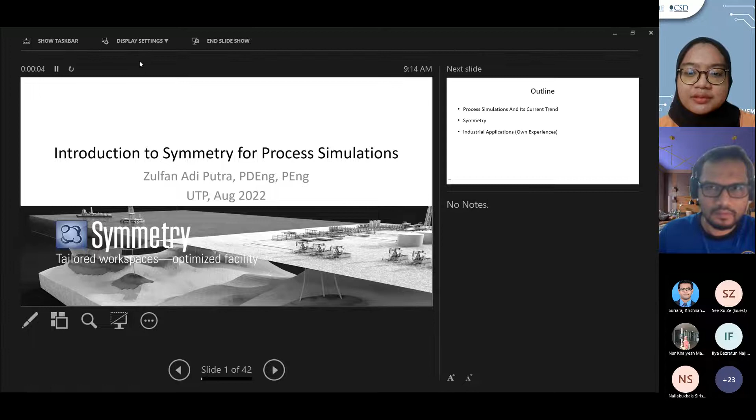Okay, so we'll discuss about symmetry first. Could you please remind me, are you all final year students or third year? Which one? I think they are from various years. Oh okay, well, no problem, let's just get started. Now, what time is it now? Okay, 15 minutes.

Before we go into how to use symmetry, I'll go briefly on some things I'd like to share about symmetry itself. We'll discuss process simulation. What is this? What is process simulation basically? Some of you may already know that, some of you may not, so let's just set some basic ground.

Then I will share something about what symmetry is, and my own experience using symmetry for industrial applications. I've used symmetry since 2016, so for the last 5-6 years. There are many other things I've done before that year, when it involved process simulation or modeling optimization, using different software. Some of those applications I will not be sharing here, because here we are discussing Symmetry, not process simulation in general.

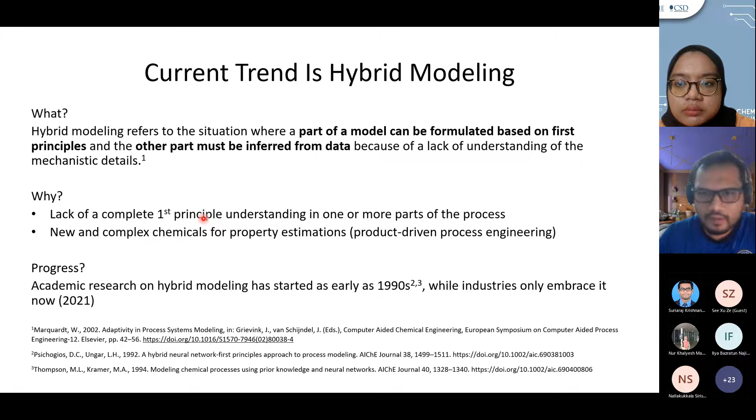This machine learning model, let's go quickly. So if we have data, either from your plants or from your literature, and if you have enough data, you can make your machine learning models, and you can also make your process simulation models for the first principle, and some properties or data can be transferred in between. For example, if we have data on a heat exchanger, and if you are reducing the temperature values, you can then predict with this machine learning model what is the overall heat transfer coefficient as a function of T, and then put that number into the process simulation model.

So you could do that, or the other way around. For example, if you have data, you can use the data to calculate the overall heat transfer coefficient, and then use that to build this model. Either this or that, you can use them, or both of them, to make a decision.

This is what I mentioned, what's in the hybrid model in unit operations capable of handling neural network models, and it is integrated with typical first principle units like flash, pumps, heat exchangers, and so on and so forth.

Now, symmetry. What is symmetry? If you know HYSYS, so Hyprotech, the same founding fathers made Symmetry, but Symmetry uses Microsoft Visio. So if you know how to use HYSYS, you could know how to use Symmetry without knowing it. It's just that visually it looks more beautiful because it has this Visio aspect.

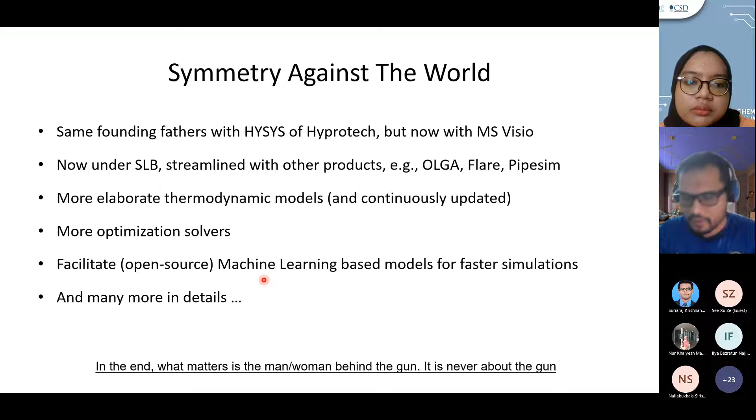So what I like and don't like, there are a few things. I'll go quickly on this. Thermodynamics, as I mentioned, in Visio, open platform for machine learning models, and robust neural network deployment related to the machine learning model.

And it's a flow sheet convergence window, so we can prioritize the recycling loop. The user interface is clean, straightforward, and you can use the same flow sheet to make a steady state and also dynamic model, just like HYSYS, but we cannot do so in Aspen Plus. In Aspen Plus, we have to export that steady state model and open it in Aspen Dynamics, and then fine tune it. It's not that easy a transition.

A lot of optimization solvers, many options for pressure drop correlations as well. Then contexts can be easily configured, just like HYSYS.

But what I don't like about this is, like I mentioned, I like Aspen Plus thermodynamics model much more. There are no shortcut distillation units in Symmetry, though Aspen HYSYS and Aspen Plus have them. And the development of our own unit operation is not as straightforward as in Aspen Custom Modeler. We can make our own operating unit in Symmetry, but it's not as straightforward as Aspen Custom Modeler in Aspen Plus.

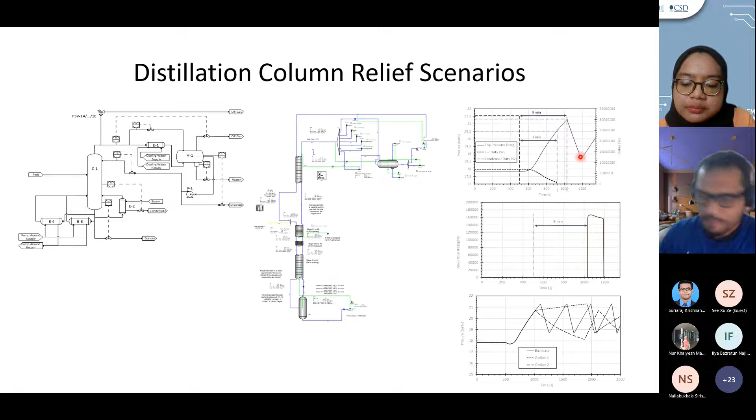Now I'll show you some stuff. This one, yeah, the rest is about the same, but I would like to show you this one.

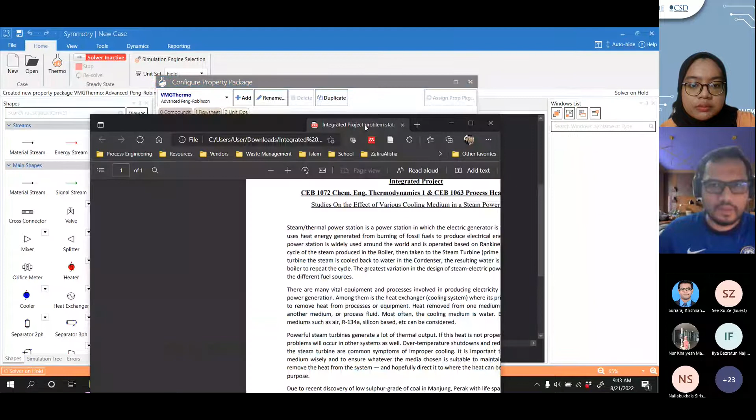It's about a cooling medium steam power station. So we have steam, which is basically water, right? And then is there any other stuff? Water - so there's no other. So we'll do water, and air, and R134A. So let's add water, and this is a steam cycle. So in this particular case, your thermodynamic model is the thermodynamic model of water - you can see the steam tables.

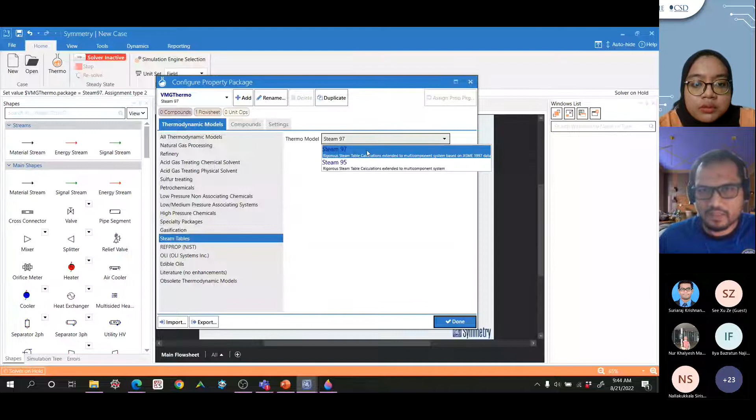Pick the latest one, the Steam 97. The compounds is basically water. You could either type and press the button once and press it again, and it will be selected, or you could double click to highlight it and get water. So double click, one click, and you get water in it.

The name of your thermodynamic model is then VMG thermo, so you could name it like your model. So your model is then your model, and then it's using Steam 97 thermodynamic model. Up until here, is it clear or not clear?

Can you follow or not? Yes, good. And then you click done. If you don't want to talk, it's also fine, just say yes or no.

Okay, now we have the thermodynamic model. We know how to select the thermodynamic model, and we know how to select the components that we need. The next step is then the unit sets, so we need to select depending on which unit you're familiar with. Here we are more familiar with SI units, so that's the units we're going to use.

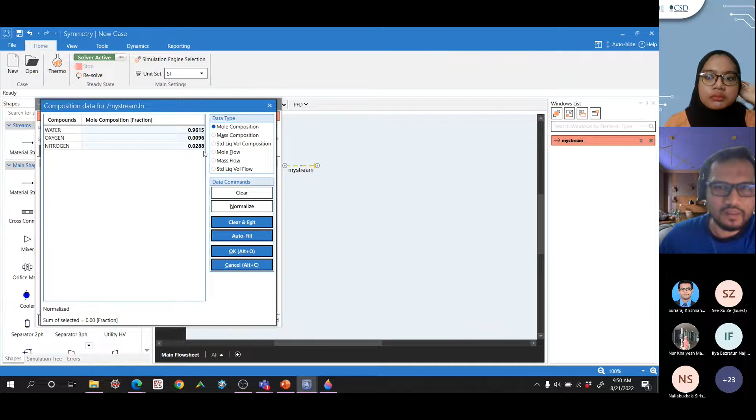So if you click OK, you will see this composition, and we can calculate the phase of that fluid. There are three items that we need to specify before we can calculate them: temperature, pressure, and the vapor fraction or phase of the fluid. In this particular case, with this composition and these conditions, your vapor fraction is 0.04, so basically you have 4% vapor and the rest is liquid.

So in this case, you can see your vapor is coming from these gases. Now, why do you need 2 out of 3? Why specify 2 out of 3, not 3 out of 3 or 1 out of 3?

That is something you have to ask your thermodynamics lecturer, or go back to your thermodynamics book. If you ask me to explain this, it will take another 5 minutes, so we could do that later on.

So if you remove this, for example I want to have just 1 component, you get a density of exactly 997. See? If you put another gas in, you'll have a lower density. And if it's pure water at ambient conditions, it is liquid — there's no vapor, so it's all liquid.

You can see the color changes — it was blue, now it's purple. What this means is you can go to Tools, then Settings, then Visio PFD, and you can see: if it's purple, it's a liquid, which is what we have now. If it's blue, like before, we have a liquid and a gas — a mixed phase. And if we have full vapor, it shows a teal color. You could change it, but I'll leave it like that. It's not something to memorize, but it gives an indication that the phase may change — it's a helpful visual aid.

Do you have any questions so far? No? Okay, if you don't, then fine.

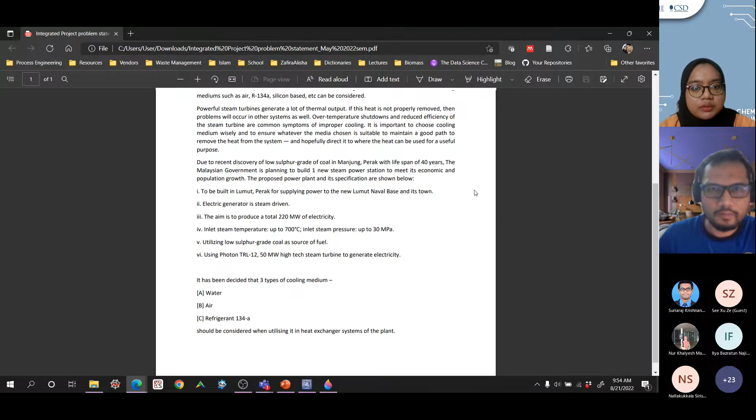So I will put it here. Just close this, I'll show you. Let's see if we can do this quickly. I'll put it side by side so that you can see it and I can see it. So small. Okay, can I do this? Okay, now.

Yeah, so this steam turbine stuff — let's read this together. The electric generator is steam driven and uses heat energy generated from burning fossil fuels to produce electrical energy. It's very inefficient from that perspective. This type of power station is widely used around the world simply because at the time people didn't know any better. Nowadays people know something better, but because it's been historically done that way, people are reluctant to change. Nonetheless, it's operated based on the Rankine cycle.

So what is the Rankine cycle? If you don't know, you can Google it. Or does anybody in the audience know what the Rankine cycle is?

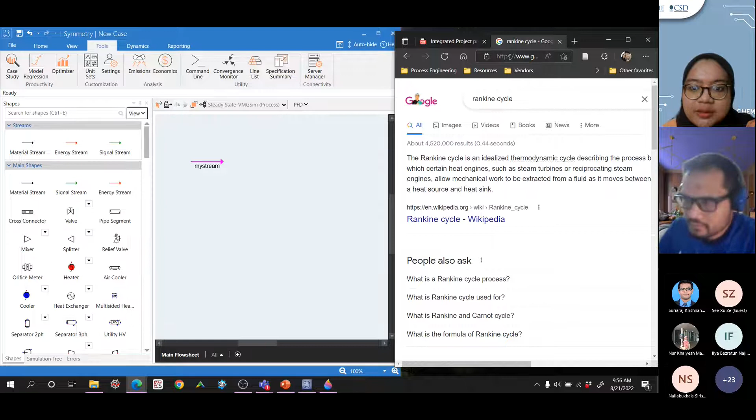So the Rankine cycle is... where's that stuff? This one. So we have, which one is the easier? Rankine cycle, I'll find a picture. Nah, this one. So you have this.

So it says you have a boiler, and you are burning fossil fuel, right? So you are burning fossil fuels, and from that burning you make your steam. Steam is produced in the boiler, so you have a boiler, and you are using fossil fuels in it, and you burn it.

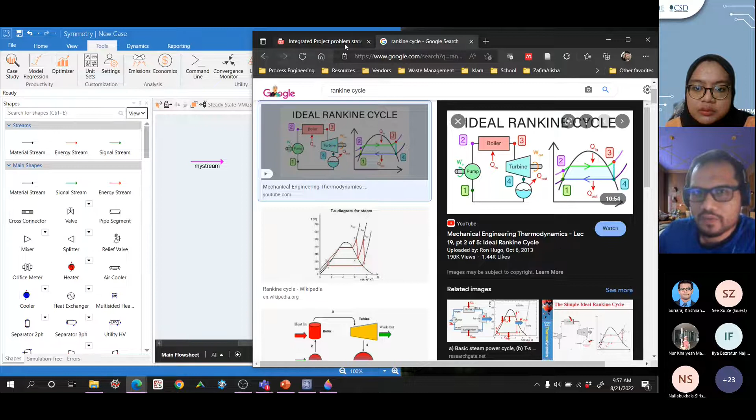So the question is, could we model this? We could model the fossil fuel, the amount. Just do that, for the sake of introduction. So now we have fossil fuels. What kind of fossil fuels are you using? It's not known, nonetheless, well, let's just use methane gas. So in that methane gas, say for example we forgot to put methane, right?

So we add methane. Click once, so you have your methane. So we burn methane. When we burn methane, we need also oxygen. We have oxygen, and then we have water, and we need also CO2.

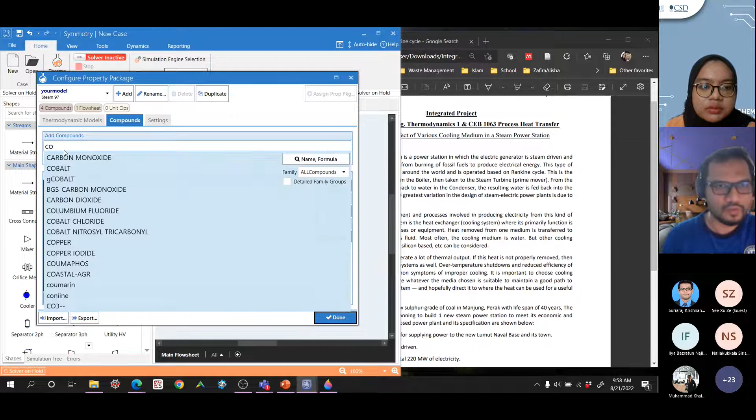So now you have your methane, for example, your natural gas, and assume it's like pure methane. And then it's ambient maybe, and simply slightly above atmospheric, because then you can push it towards the burner. So let's make it 2 bar, and the unit is in kilopascal.

So if you put 2 bar, you want to change it to bar, so you can either put 200 kilopascal, or you can press space, and then you have all kinds of units over here which you can select from. So 2 bar, which is then 200 kilopascal. You can also make it like, I don't know, 1000, just put a nice number.

Okay, so now we have natural gas, and you want to burn it in a furnace, right? So to burn it, you need to have oxygen. You have oxygen, air. It's also like 25 degrees C, like normal air, and it's also like 200 kilopascal.

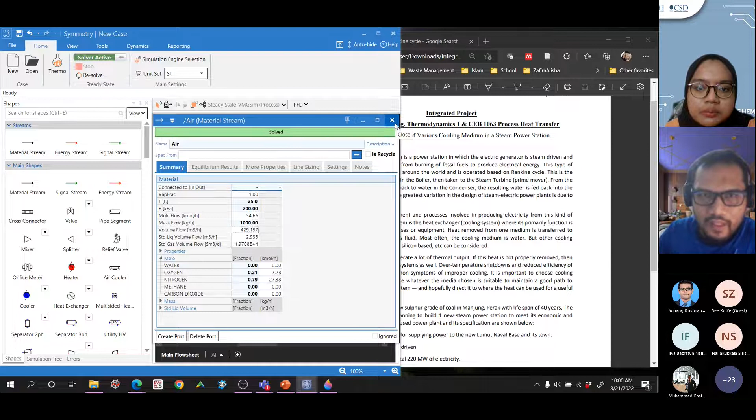Okay, so you have now air, you have nitrogen and oxygen. You have natural gas. So you burn it because you need to get that heat from the burner. So how to do that? Obviously, number one, you have to mix them, right? You cannot react something because it's oxidation reactions.

Just drag and drop the mixer, connect it over here, and then this one is over there. And then you can see it was gray, now it's dark black. It means it is solved already.

See, it's solved already. Why is it solved? Because we haven't specified anything. It's simply because there is one degree of freedom for this mixer, and it calculates the outlet pressure over here as the lowest between the inlets. So we have now two inlets, air and natural gas. This is then in zero, in zero is the air over here, which is air.

So this is quite inconsistent. This is also what I don't like about Symmetry, because air is on the top, air is on the very left, and I would expect that air is also on the top, not the bottom, but nonetheless it is there. So we have natural gas, and the second inlet, both are 200 kilopascals, so this is also 200 kilopascals then, and they are mixed together.

So it's simply a mass balancing, simply mass balance. You could see as well the mass is just 1000 plus 1000, 2000, and then the energy also will be calculated accordingly.

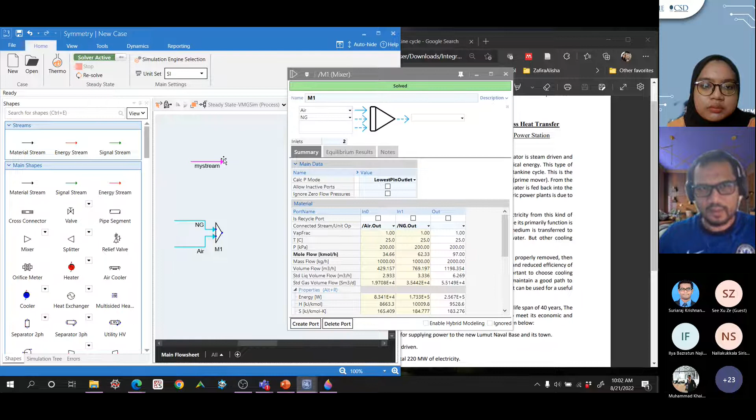So for every unit operation, in is somewhere on the left side like this, and the same goes with having in stream over here and out stream over there. That's how they calculate this block. It will be calculating block by block, getting information from the inlet input, and then it will calculate what's the output, just like this one.

So we can simply, because the output has already been calculated, just drag and drop this stream over there, and you can see this S1 is connected, and then it is solved automatically.

So now we have the mixed air, we mix the air and then the natural gas, and now we simply burn it. That burning is an oxidation reaction, right? So if we assume it's complete combustion, because what we care more about is the heat that we're going to extract from it, we can go to reactor.

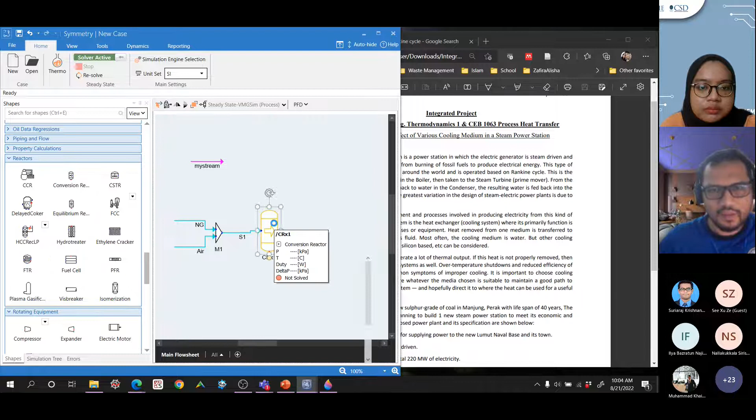Reactor is, yeah, you can simply just get a conversion reactor like that, and then connect it there, and then double click on that. So from here we have to define, since it's a conversion reactor, we have to define the reaction first.

So this is oxidation reaction. Now we can go to the reaction tab and click add or edit, and then you can name it oxidation reaction. And then you can say it's methane, right? So methane is -1. Methane has 1 C, so it means the carbon dioxide should also be 1.

And then we burn it with O2. So CH4 plus O2 becomes CO2 plus H2O. So how much is that DH? How much is DH?

It also means you need only 2 water. So 2 water needed. So we have CH4 plus O2 becomes H2O plus CO2. So you have 4 oxygen on the right hand side, that means on the left hand side you need to have another 2. So when you do so, you see that this balance becomes 0.

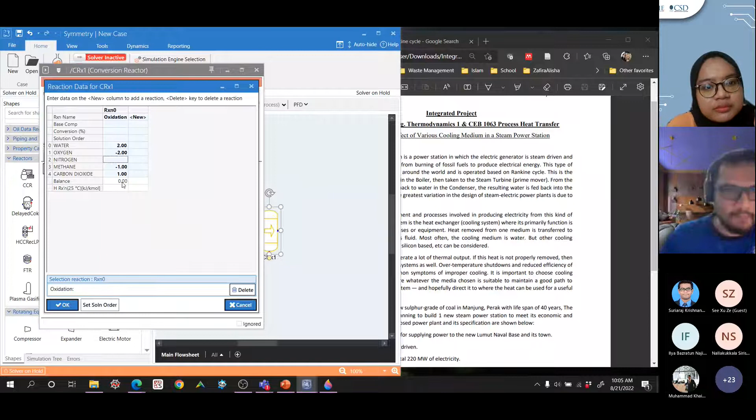This is now zero, that means the stoichiometric reaction. The conversion is 100%, so we assume this to be like 100. And then what is then being converted? So this is what this base component is all about.

So we need to specify. We have specified the reaction, we have specified the conversions. What we haven't specified yet is what is being converted. So in this case, what is being converted to 100%? What is being converted by 100% is then the methane. So in this case, we put methane.

Minus, you know what minus means, yeah? Minus means it's on the reactant side, plus is then on the product side. So this is then the conversion, and this is then the heat of reaction at 25 degrees C, 802 megajoule per kilomole. And then you click OK.

There's no other reaction, right? If there's more reactions, then you can just click new. Okay, so now we have the reactions. Up until here, do you have any questions, or can you follow this? I don't know, I know that I'm maybe too fast, but I'm not sure.

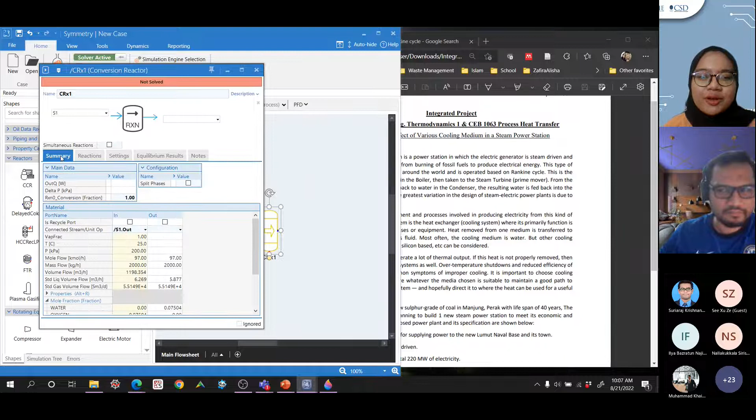Can you follow? I have one question. Can you open the reaction tab again? So how do we decide the base component? Is it something like limiting reactant, or how do you decide it is methane that's being reacted? The base component, so the reactant. But I think we have two reactants, right? Methane and also oxygen.

In this case, what exactly do you want to do with these reactions? You want to, because oxygen is an oxidizer, so it will oxidize something. But you cannot oxidize oxygen, there is no such thing. So if you oxidize methane, that means methane is a base component. Obviously, mathematically speaking, you could then use oxygen as a base component, it doesn't really matter as long as it is one of the reactants, you could do so. But then from the physical standpoint, something is the one that is being limited, so that's the limiting thing, and that is then the methane. Methane is being oxidized, that means methane is then the base component.

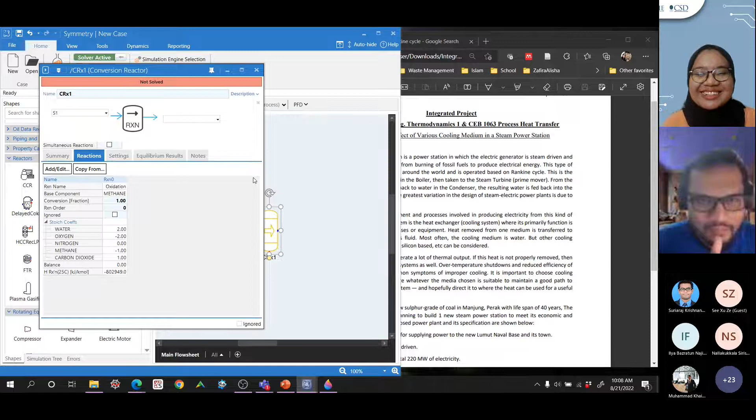Hello? Can you hear me now? Yes, I can hear you. Hello, hello, can you hear me? Disconnect and connect it again.

Hello? Hello, can you hear me? Yes, I can hear you now. So when did you lose me?

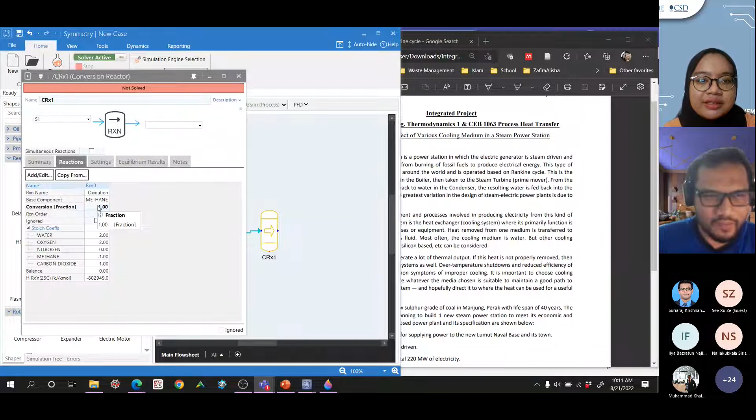So we were discussing how to use the base component, and I said the base component is the important component in the reaction—the one being oxidized, which in this case is methane, the main component in this particular reaction. Is that clear, or do you need another example on how to select the base component? I think it's clear.

We also have another question from the audience in the chat box. He asked, can we add a catalyst-based reaction into Symmetry? Yes, why not? The question is, can we or can we not?

The question is then how can we understand what is being done. In combustion reactions or other reactions, there are several things to consider. I think that stems from the understanding of reaction engineering—basically, it's not about the tool.

Let's see if I can write this. So now you have component A, and a reaction where A becomes B. You can say, well, I have a catalyst here, and during this period of catalytic reaction, I make B from A.

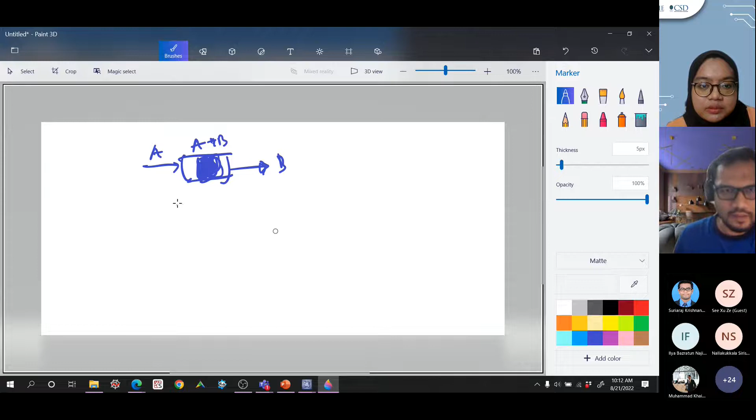So question number one is then how much B is being produced? If you know that the yield of B is 90%, that means you can simply calculate B. So you get your B. B is done.

Then you can come back with your reaction engineering class to say, okay, if I want B at 90%, I know this from the literature, and I know the flow rate of this stream, so I can calculate the volume. If you know the volume, and the volumetric flow rate, and the density of the mixture, you can then calculate the diameter of the reactor. From these simple calculations, you know the volume, the length, and the diameter—that's how you get insights on the size of your catalytic reactor.

So that's number one. Number two is if you don't know the yield of B, but you do have a kinetic expression—for example, rate of A equals minus K times Ca to the power of 1, 2, or 3. Let's just make it 1, for example, to make it easier.

In this case, you can say, for example, I want to vary this—I want automatic calculations so that if I have this reactor, and another reactor like this, where A becomes B, how much B is produced here, and how much B is produced here?

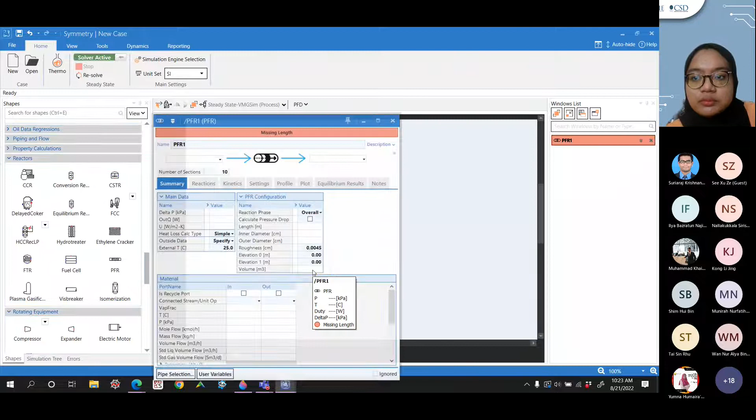Okay, and then we put it there, and then it goes to the reactor. Where was it? No, equilibrium reactor. So if you want to use this PFR, if you have the kinetics, like I explained before, you can use this PFR, but again you need to decide on the length and diameter, and then it will calculate for you what the outlet conditions are. So once you specify the reactions, all this kinetic information will be available. Now it is empty because we haven't specified anything.

But for this simple conversion reactor, for the questioner, if you the person who asked this, what's his name? Her name, Suharaj. So if you have a specific example on this, just let me know. You can write down the kinetics in the chat, and then I can simply show you how to do so. Just find that particular problem that you are concerned with, and let's do so.

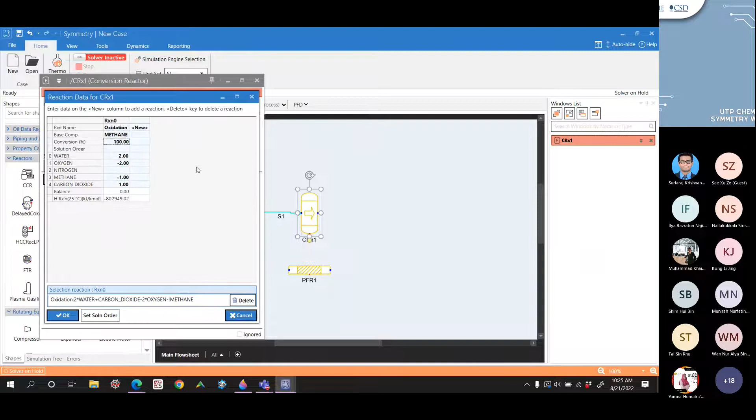So connect it over there, and then we have reactions first, and then we have methane is -1, carbon dioxide is also 1, and then water is 2. So conversion is 100%, and the base component is methane. So done, so we have done the reaction, and we know that conversion is 100%, or we make sure that it's going to be 100%.

And then now we specify, because as all fluids, it will only flow if there is a pressure drop, so that means we need to specify what the pressure drop is. So we either specify what the pressure drop is, or we just key in what the outlet pressure is. So say, for example, it's just a very simple reaction, so probably 1 bar, or something, is then 100 kilopascal. So 1 bar is then the outlet, the pressure drop, so the outlet pressure would be 190 kilopascal. Now, once we specify the reactions, we have specified the pressure drop, so we need to specify what the state of the reactor is.

So this reaction is an oxidation reaction, right? Oxidation reactions, which means it is an exothermic reaction. It will then release heat. So that's from the reaction standpoint.

But then from the reactor standpoint, are we going to operate isothermically, meaning we have a constant temperature? If so, we can simply specify the temperature here, and it will calculate how much heat is released, since we're releasing heat, but you want to control the temperature by using a different type of cooling medium, for example. Or we can let the reactor behave adiabatically, meaning there is no heat going in and out of the system. In that case, we put Q equals to 0.

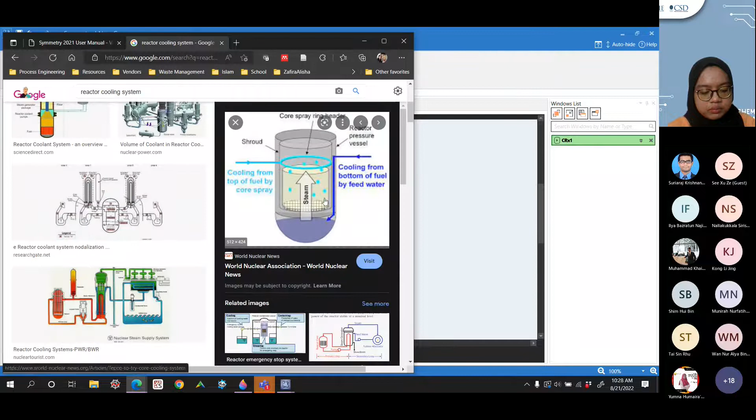So this reactor creates heat, and that heat is then used to create steam. Typically we have a jacketed system over here, so it's either around a jacket or in a coil. The amount of steam we could create, we have to calculate the heat enthalpy of that particular steam at that pressure, and then use this amount of energy. Then you can calculate how much steam you can make.

For now, just keep it adiabatic, keep it adiabatic. And this is it, for the time being. Then I'll show you, because we're going to need that heat. That heat is going to be used. Remember this task: steam is then being produced. Sorry, the heat is not being used, but that particular steam is being used to heat, to produce the steam.

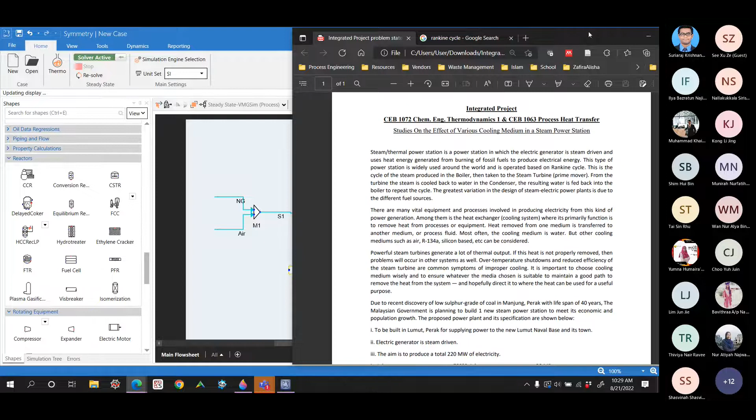So you could do it 2 ways. You do what I said before: what type of steam do you want to produce? Are you going to produce a higher pressure steam or lower pressure steam? So say, for example, you want to make steam, check the steam table.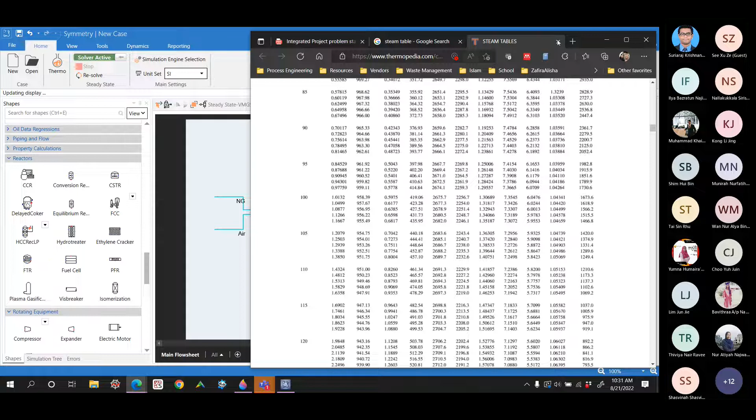Say, for example, you have this guy. Close this. So this guy, it can create up until 600 degrees C. You can see that, up until 600 degrees C. So that's 600 degrees C.

So you could then have, yeah, depending on what you want. I'll have to put that Rankine cycle again, because it has something to do with this. It will have everything to do with this Rankine cycle.

So you can see, because it will then create steam, and then this steam is going to be flowing through a turbine. The higher the pressure of the steam that you make, the more power you can generate. So it depends on the pressure and the amount of volume, the amount of steam that you are generating.

Since we have a fixed amount of energy, you can play around with what is then the pressure, what is then the flow rate, in such a way that you can find how much is then the electricity. So it's something that you have to find.

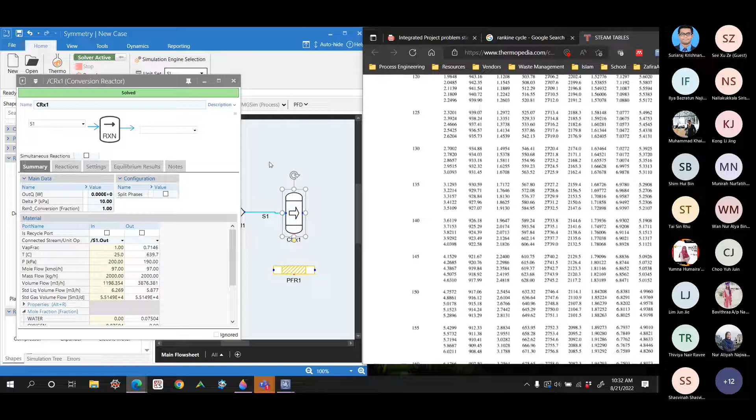So let's assume that we make, like I mentioned, a 4 bar steam for the time being. In this case, this is one approach. What I mentioned is that in this case, you make this...

So you make this like 160 degrees C, and then the steam that you can create, if you put like 4 bars, that means you need to have a temperature of about 144 something. So maybe then you can have a nice driving force in temperature. So 160 is good enough.

So then you can make about 4 bar steam, and then this is the amount of energy that you are releasing. In this regard, if you put this energy... no, it's not being used somehow.

Nonetheless, you know what the energy is, so we can then use what we call a process calculator. This process calculator is our control panel, so to say. So this control panel, steam 4 bar.

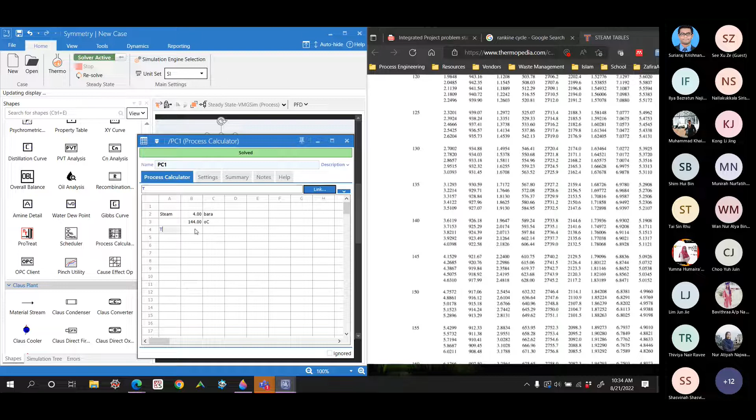4 bar, and temperature is 4 bar, and temperature is 140 something, 144 about. And then the amount of temperature in boiler, heater or whatnot. So this is then what we specify over here.

No, we cannot do so. So what we could do is make connections over here. There's another trick, because we cannot make connections. See, I cannot make a connection. So I remove this and put it over there, 160 degrees.

See, so this is now being calculated, and then you can see we can have the 160 over here, and then the energy is over there. Then we can say, okay, now I copy connections, and put it here, and then paste connections. So it is being connected, okay.

So for example, if I change this to 155, this is then changed accordingly, and the amount of energy released is this much.

Copy connections. So this is, yeah, it's very ugly. Watts - how much is this? Divided by 1E6, that's megawatts. 0.6 megawatt. Okay, save. Don't forget to save.

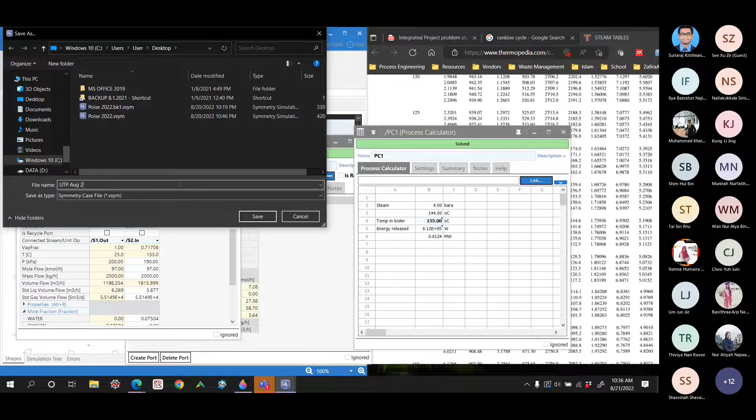Desktop. This is UTP. Oh, good. Okay, you can see now here, this value is connected to process calculator 1, PC1, sheet 1, and then B5 over here. So this guy.

Okay, and then this one is, yeah, that number. So that's one, and then you can say, okay, this is the amount of energy released, and then you can calculate if the energy of water is about, I don't know - for example, you can have about 2,100 kilojoule per kilogram roughly. That means if you have this megawatts, this has to be multiplied by 1,000 to get it into kilojoules, and then you divide this by this, and you will have steam in kilogram per second.

Can you follow? Can you follow or not? So we divided the amount of energy released by this energy of water.

So this 2,100 is what you get from the steam table. For example, on average, because the heat of evaporation of water varies from temperature to temperature, or from pressure to pressure - the highest being around 100 degrees C or less, it's about 2,200. So on average, I would make it like 2,100 kilojoule per kilogram.

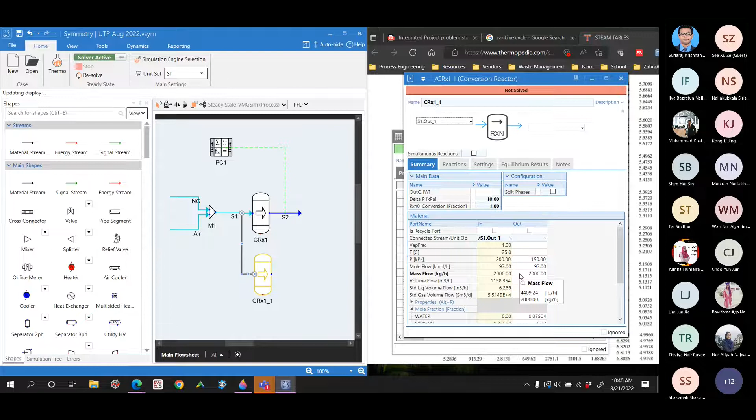And then we can see, say for example, if I want to make this adiabatic, yeah, so I contain the heat. So it's the second way. So it will then be doing it that way. And then we have the outlet stream.

And then this outlet stream, we need to use that energy, right? Because this outlet stream is 639 degrees C, I want to use that energy to create the steam. So in that sense, we put a cooler in it, and then that cooler is...

Oh, I don't need to. I can directly put a heat exchanger, because then the heat exchanger - so heat exchanger, and then I have to have a stream, right? So water stream, because I want to make it a steam.

And then this is obviously like 25 degrees C. It's also like I don't know, so this is then depending on the bar and the pressure. So say for example, this is option 1.

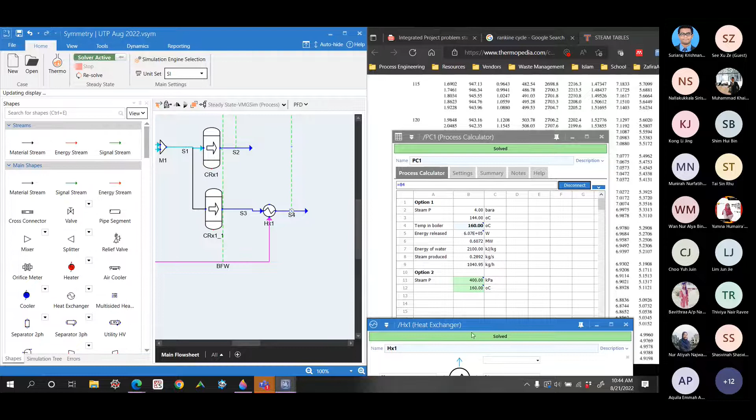So now it's all so, once we know the temperature outlet over here, that means we will then calculate how much the Q, and then that Q is then going to be used to heat this water stream. So this part of the plant is calculated already, like you see - it's calculated already, and it's just a matter of us connecting them.

So this is then the steam being used. That steam being used is S5. So S5 is in this case, yeah, it's 1,000, right? And then the temperature is about 141 degrees C. So this is our approximation - it's not that very accurate. So 144, but then this 141 degrees C is the one that is more accurate.

But this is related to this particular design. So we have this 1000 inlet, and then we have everything else. I think about the same - it's just a matter that we have the enthalpy of this particular steam. We use it differently, so it's not 2100. It's something that is more accurate regarding this pressure and temperature.

So this is then your steam. I've now shown you two ways of creating steam. Steam is steam produced, and it's basically your input - this guy is basically the input. But nonetheless, just copy this. For the sake of completeness, this is then temperature.

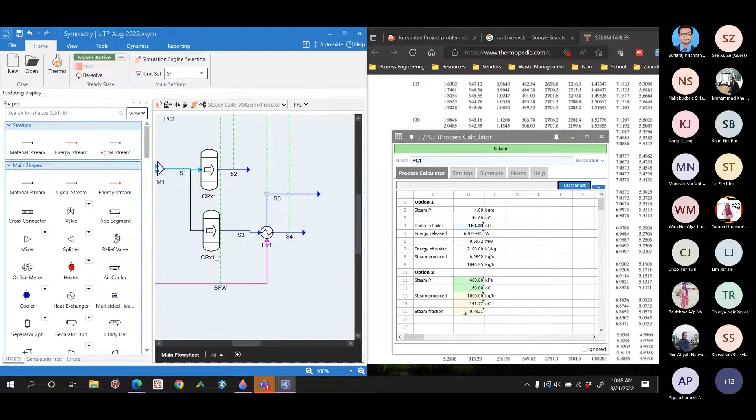Okay, so now in this particular case, if I have more natural gas, that means I could do a lot more. But one more thing to consider is that these combustions, we assume it to be 100% combustion. So that means, practically speaking, the concentration of oxygen at the outlet of the reactor, at the flare tip, has to be like 2 to 3%. So this concentration has to be 2 to 3%.

We are not enough - see, this is not enough. So we still have a lot more methane not burnt. So I'll open for you the reactor itself.

So oxygen is consumed in the outlet, sorry, flow rate - for more flow, oxygen is consumed, but then the methane is not consumed completely. So we need to increase the amount of air in such a way that we can consume the methane a bit more. So what we could do in this particular case...

We fix this because this is still not consumed, and then this is consumed completely, the air. So we need to increase the air flow rate, right? So now complete combustion.

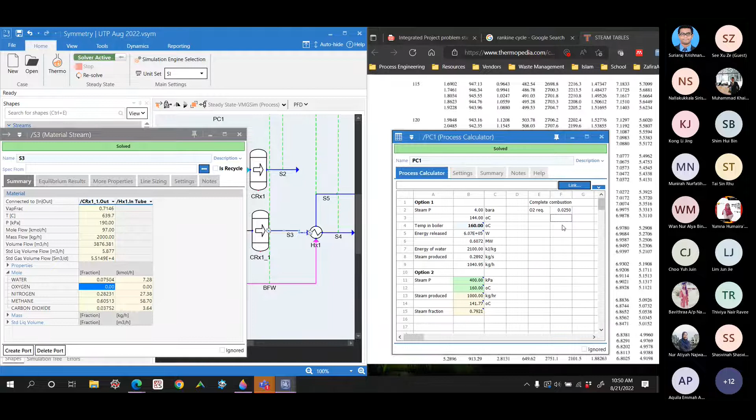So I copy this, and then this is then what I have to paste. Does it want to be copied? Oh, another extension. Copy - this is calculated. So that's the error, that guy.

Okay, so in this case, we want to minimize this. So we minimize this in such a way that we increase the air flow rate, right? So if we minimize this, that means this guy becomes closer and closer to 2.5%. So how do we do that?

We either make it like a manual, like this. So I increase now - so I increase now to 2000. We have a temperature cross in here - we have a temperature cross in this heat exchanger. So something that we have to be careful about, but we still need to...

We will look into this later on, yeah, we'll look into this later on. But we are not getting any better. So we could also make it like 10,000.

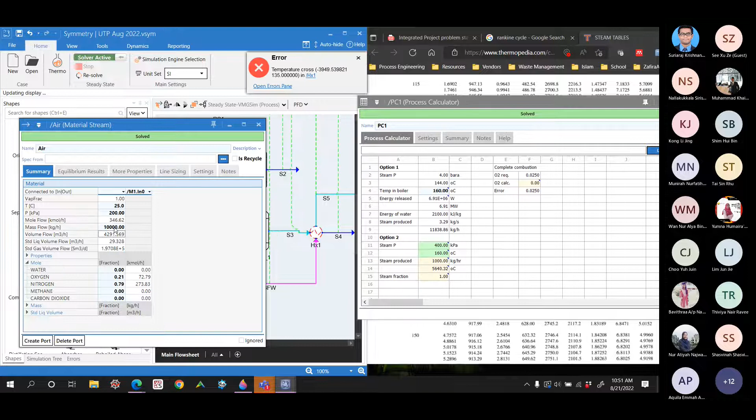So we're also not getting any better in this reactor, so indeed we will have to reduce this. We have a reduction in the methane - it was 58 something, now it's 25. So we are getting somewhere.

So we can set up a controller to adjust it automatically. I want this error to become 0. So I copy connections, put it over here. The target is obviously 0.

Target is obviously 0. And then what do I manipulate? So what I manipulate is the flow rate of the air - in this case, this guy. Copy connections and put it over there. And then it means the step size - you can put, I don't know.

So now the target is 0.05, so it's not yet okay. We want to have it like - it's 1.9, so it's less than 2.5%. So you want to make it - you can increase this a little bit more, I don't know.

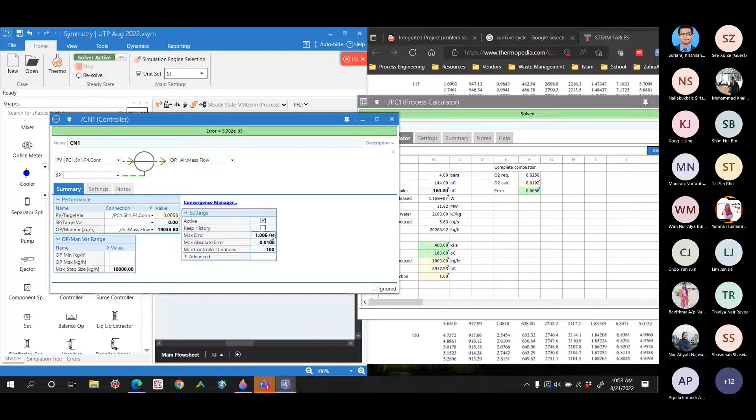Maybe you can increase the maximum error to become like either one of these - there. So maximum absolute error I increase, I reduce the absolute error, so that will then create this. So in that sense, we need to have 19 tons of air, as opposed to 1 ton of air previously in the original case. Okay, so that's how we solve it.

So we have the complete combustion criteria fulfilled, and now we have to solve what is then happening. We'll have to make this nicer - I want to make it like, how do you call it, there's a temperature cross. So what is happening - temperature cross. So we have, for example, in this case.

So we have the adiabatic temperature rise of this stream is about 1700 - it was 600, now 1700, much higher. And then we want to reduce it to 160 degrees C. By doing so we are increasing - we are using the steam, which is then we use 1000. Because we are increasing the amount of energy, that means this flow rate of water is too small. Because it is too small, its temperature goes to thousands of degrees C, which is not correct.

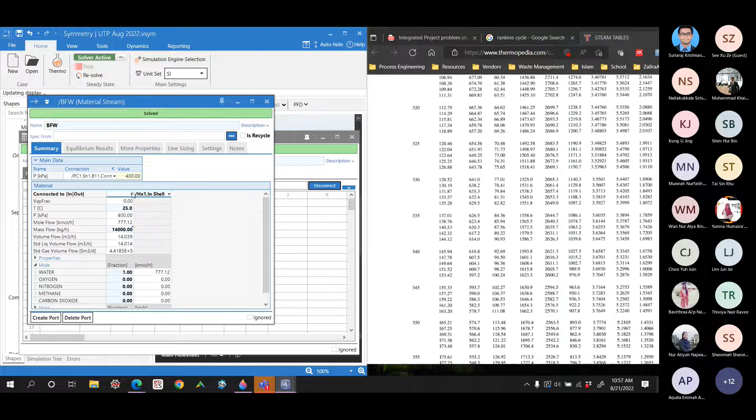Yeah, so now we have 400 kilopascal of pressure. So if I want to increase now, instead of 400 kilopascal, I want to have this also controlled. I will then have to remove these connections, disconnect, and add somewhere here - so this is then 4 bars.

This times 100 kilopascal. This is then connected to the stream. Okay, so now we are aiming about this 330 something degrees here, and then if we increase the pressure - a minute, yeah, how do I pressure?

Connections. Oh, this is the pressure, so I put it in bold. So if I want to increase the pressure, for example, in this case 137 bar, so it's about the steam produces about 400 degrees C.

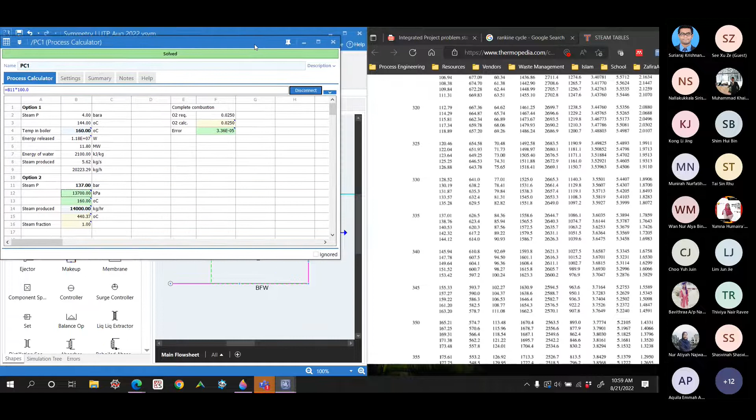Where's the exchange? Where's the stuff? At 400 degrees C, I increase the steam pressure to 400 degrees C, and then the flow rate is that number. Yeah, it's about that.

Now, this is the amount of steam that we can produce, that we are producing with this setup. And then what do we do? Hey, is there any questions? Because I'm now doing this myself, and I feel like I'm losing you, or you are losing me.

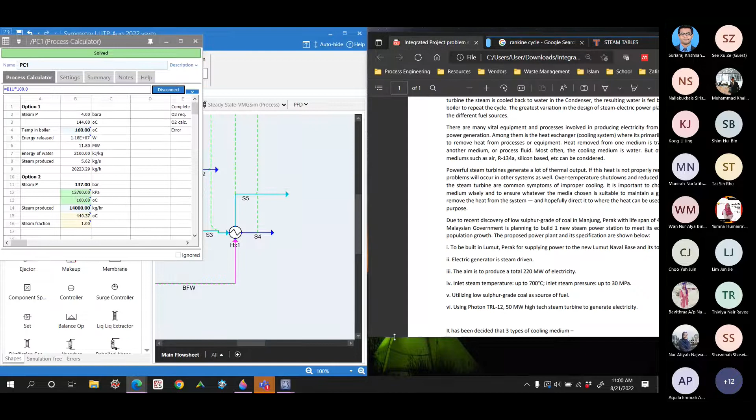How do I make this? Now this looks complicated, but I'm just showing you all the possibilities. It's all up to you to pick which one is okay that you want to follow.

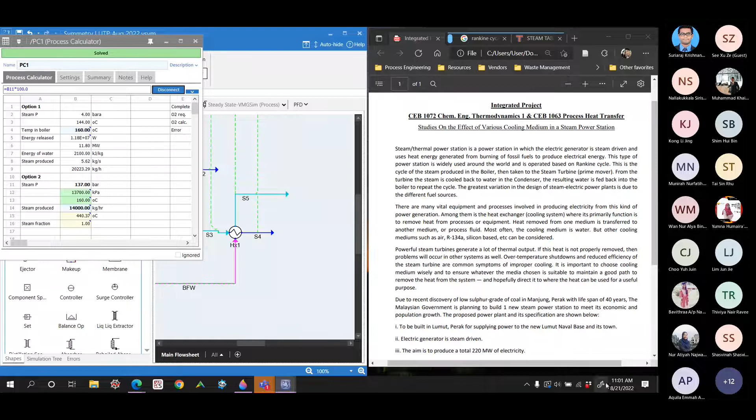So we have the steam, which is over here, and then this steam is going to be sent to a steam turbine. There's the third way, where we make the cycle first, and then we work around it. So let's do so, let's see.

That's another way. So this is the first way, second way, and then there's a third way, which is the easiest one, which I just realized. So we now expand this to a turbine, this steam to a turbine. So we expand it to, like, for example, a condenser, where we have to have like water or air.

So in this particular case, we can then drop it down to atmospheric, for example. Atmospheric is then, so let's put like 150 kilopascal. And then the efficiency is about, let's put efficiency about 85%, and then you can see now we can get the energy out, which is in this particular case 2.8 megawatt.

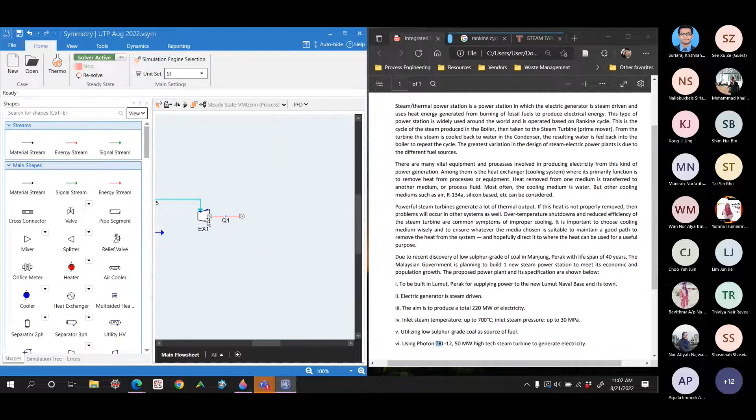So I copied this, 2.8 megawatt copy connections, and then put it, where is that guy, put it over here. Turbine efficiency, 0.85 megawatt, and then this is then the efficiency is, yeah, I need to have, it's not that easy.

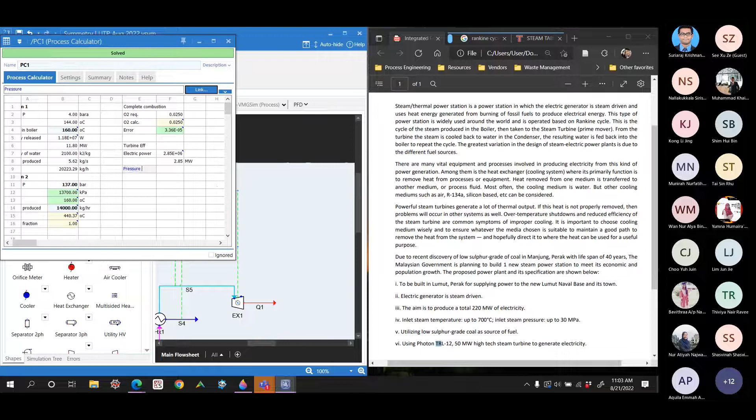I need to have like pressure out. Not nice, because these two, pressure out and turbine efficiency, are the input, so we need to make it... copy, no I'll do later. Okay, and then we have now the stream.

50 degrees C. So again, we use the same trick because we want to copy that number. So I delete that over here, put it over there, and then I copy this kilopascal. I increase this to 150. So we would expect the electric power would then drop by a certain number, so it drops to 2.7 instead of 2.8.

So you have like a much more efficient turbine, then we can have a higher, a higher or a lower efficiency. So that is one way, and then now we have this turbine. So let's complete the cycle. What do we have next?

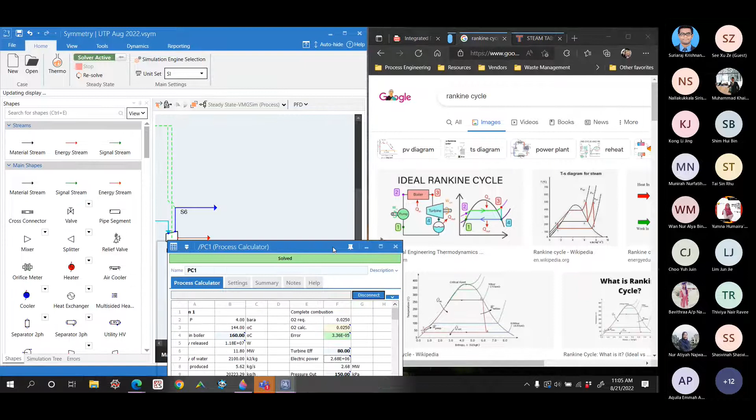And then it's a cool back, so we have the turbine. So we have done this, we have done that, and then we are cooling it down. We're cooling it down. What's the temperature over here? So to know this temperature over there, you can either hover over it or double click on that, or you can have like a show PFD data sheet.

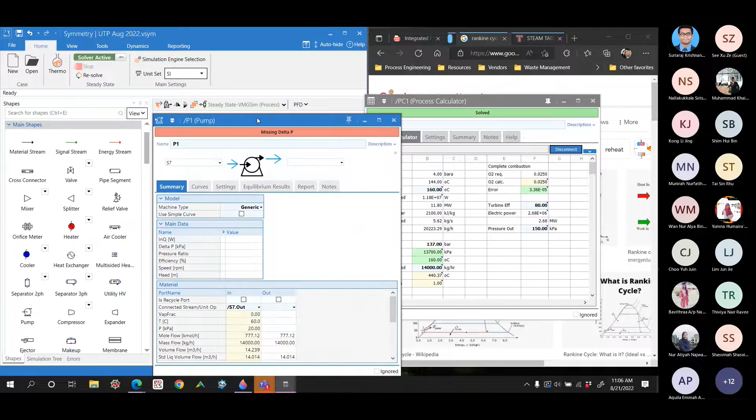And then once we cool it down, we pump it again. So we have a nice pump operating only at like 60 degrees C. And then we switch it the other way around, put it over there. And then I have the pump is, again, efficiency is about, I don't know, 70% maybe.

And then the outlet pressure, because now we want to have, no, that's the trick, we want to have a pressure of about 137 bar. So we need to have 137 bar.

That's one. So we are pressurizing it to 137 bars, and then we are connecting this to that heat exchanger. So save it first.

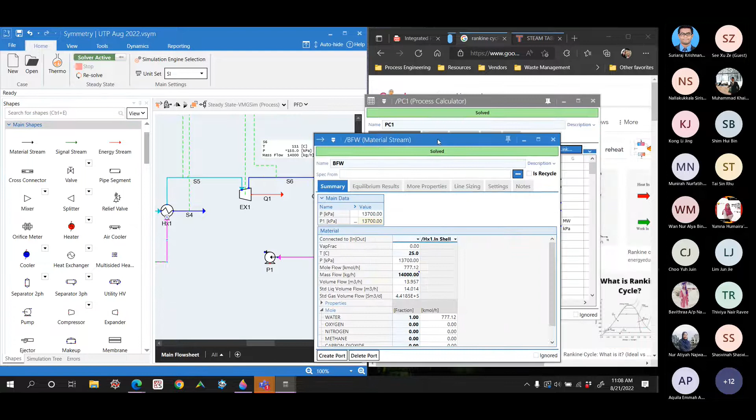Now let me think on how to better do this. This is what we have from this stream - steam pressure is that guy, which we can copy later on. This input is basically 137, which we can take from here, and this is also there. So what we could do is make a copy, or I'm not really sure if copying this would be that easy.

Now I will take this out. Okay, it is all locked, so I unlock this and take that out, and then make this guy over there. So now 137 is...

137. So this is option 3. We make the cycle now. Steam pressure, just copy this guy. Like this. This is bold.

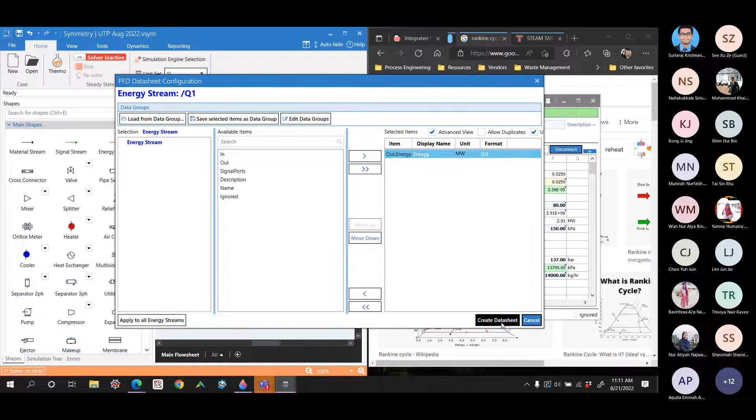So apparently we do it right. So in this particular case, where is that stuff? I want to have this Q. Show. Right, and the unit is in megawatts. So this is the amount of energy that we are using, and then this is the amount of energy that is being fed in. Copy that, add to PFD data sheets.

Add to PFD data sheets. Come on, add to PFD data sheets. Oh, we have it already. Sorry. Config. Delete. This is in megawatt as well.

So we see that we have energy coming from this burning of the methane. It's about 11 megawatts, and then the amount of electricity that we produce is about 2.9 megawatts. So that's very inefficient.

So what you could do, because there are so many inefficiencies here - we have inefficiencies in the pump, which is then 70%. You could also extract this out here. Extract this out - turbine efficiency, pump efficiency.

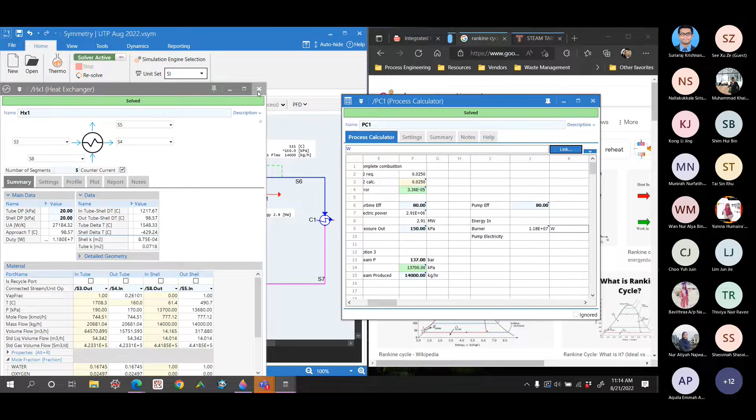So we have burner, we have pump electricity. Burner is this guy. Copy connections. So this is one - this is thermal energy. You have to make sure that this is what is thermal energy.

And then we have also electricity from here. This is electricity, not thermal energy. So the watts, even though they are the same watts, they are completely different. What's electricity? To create electricity from thermal, there is a huge efficiency loss as well.

But nonetheless, if we assume 100% efficiency in this case, we have a total energy in watts. So you can see the electricity is not that much compared to the burner. So, energy out - we have electricity produced, we have condenser. So in this particular case, energy produced is this guy.

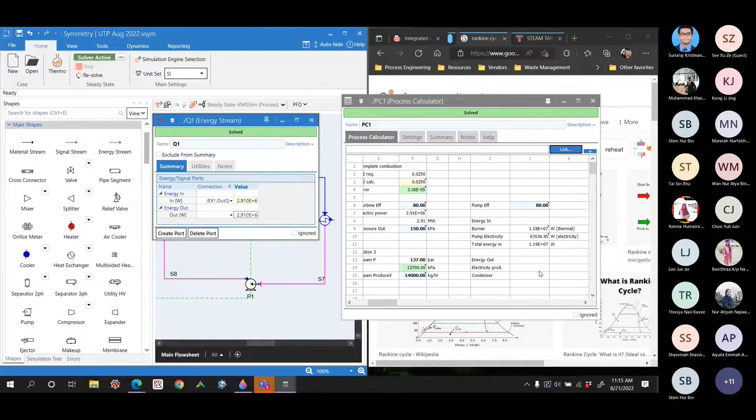Yeah, you could copy this, copy connections. So you have watt as well. And then sorry, can disconnect. Copy. Paste. And then this is then the condenser. Copy. Paste.

Okay, now you have a balanced system. So you can say, okay, now the efficiency of this cycle highly depends on how much energy goes where, because the goal is to create electricity from the energy.

You can see much of this energy, 11.8 megawatts, goes to this condenser. About 9 megawatts goes to the condenser. So efficiency of the Rankine system.

The amount of energy that you produce divided by the amount of heat that you have in, or basically that. Or maybe you could make both, because this is also energy that you need to pay for. So you could do this or that, up to you. So in this case, this compared to.

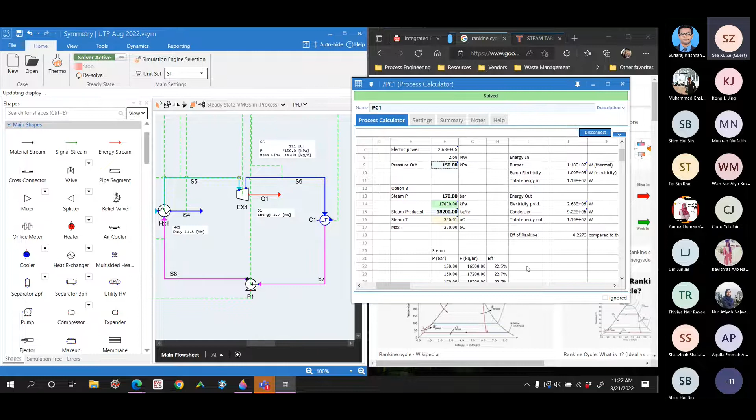But then this is limited by the maximum temperature that we apply. So if you don't have any limit on this maximum temperature, as you saw before, you could increase this efficiency a lot more. That's the thing that you can play around with. You could also play with the pressure out - this pressure out dropping down, and then you can see how much the efficiency can be increased. I'm not really sure if you can follow me, but nonetheless.

It's all like blah blah blah. The aim is to produce 220 megawatts.

So now, if you know that you have to produce 220, how much is this? It's only like 2.68 megawatts. So that means you have to increase the size. Yeah, we have to increase the size. So what's the size? The size is then the amount of...

Because all of this electricity is coming from burning the fuel, that means you have to increase the amount of natural gas or fossil fuel that you need to make. But this is by no means green energy, because it's all fossil.

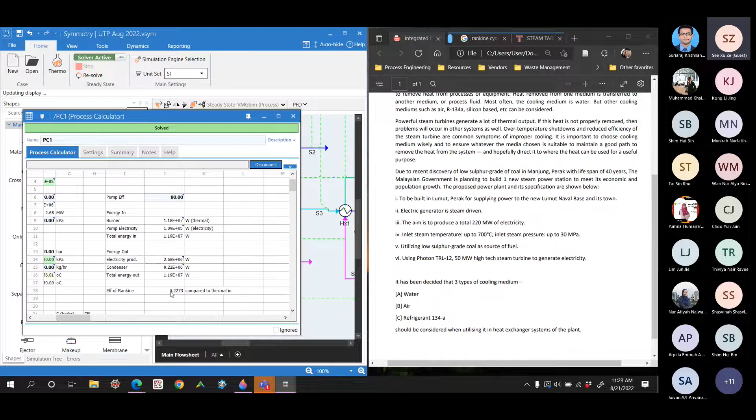So inlet steam temperature can go until 700 degrees C, while in my example it's 350 degrees C as the maximum. Inlet steam pressure about 30 megapascals, so about 300 bar. So now you have 170 bar. Now you can play around until 700 degrees C and 300 bars.

Low sulfur grade coal as source of fuel. Even use coal, okay, it's even less green. It's dark black.

Photon, yeah, I don't know what it means. So it has to be something related to the efficiency of the turbine. High-tech turbine, so find out what the efficiency is using this number.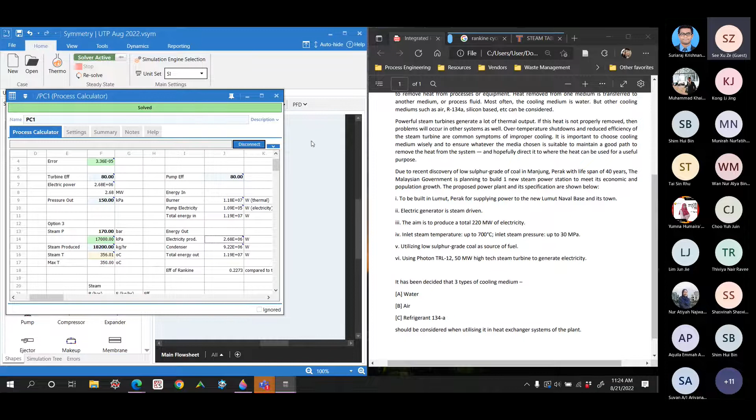Okay, I think I will stop here and see if there are any questions. I'm not really sure if you can follow me, let me know. Yeah, because I was just playing through this for myself, rushing a bit. So any questions? No questions? Hello.

Hello Mr. Zulfan, yeah. Actually we have one question from the beginning of the session, from Nalakula Sirisha. She asked whether the system can be used for desalination purposes.

You can do it with everything that you can think of, because basically it's all tools. The most important thing to know is the functions, what that process is all about, like desalination - what is the process all about. Like I showed you what this Rankine cycle is all about, and from that process we then derive what type of functions that we need to have.

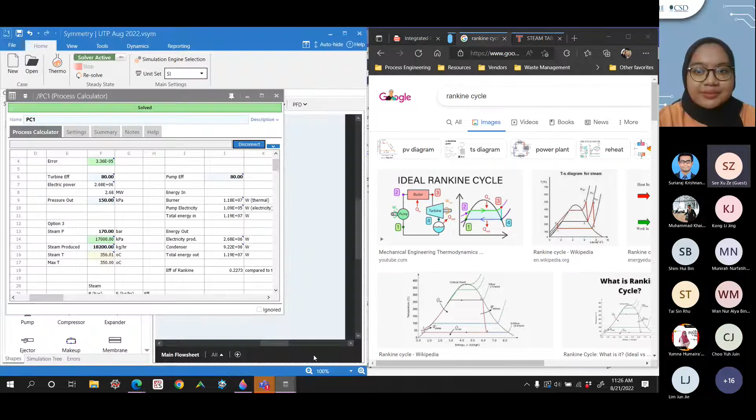So for example, in this case, your Rankine cycle, we need to have something that burns the fuel. Hence we make this, and then this. What do we burn? We have the fossil fuel - in this case I put natural gas - and then we have to have air, and then we define the reactions, and then we extract the energy.

So that's this reboiler. The whole thing with all of the controllers on the air burner is then the boiler basically. So this whole thing is the boiler, and the steam is this whole line. It gets steam, the steam goes to the turbine, then to the condenser, then to the pump, then back to the boiler. This is how you saw it already, how we model this. Understanding the process is very crucial - if we understand it wrong, we will model it wrong, obviously.

And the second thing is that we know what functions are needed for such a system, for such a cycle. But in short, if you ask can we or can we not, it's always - we can. Yes we can, or as they say, Malaysia boleh.

This one I don't know. I don't know, I don't know. This one I think we have answered.

So Surya Raj, do you have an example? Now we have a few more minutes for questions - do you have an example on this? Then we can simply play around and plug it in so you can understand. Because if I only explain this, maybe you understand it, maybe not, so it's going to be very difficult if you want to do it yourself. So if you have a specific example, just ask me and we can do it now.

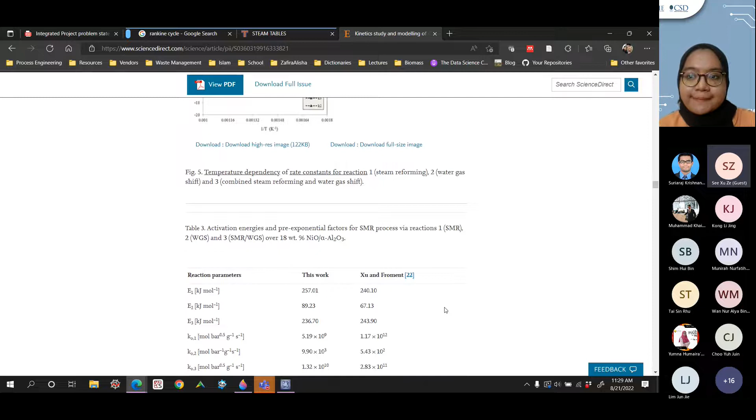It's very easy, reaction parameters. What is the equation here? This one. So A1, A2, and A3. A1, A2, and A3.

Oh, mom. Because we need to have the kinetics in terms of that K, and then in terms of this. Oh, okay. Okay, this one.

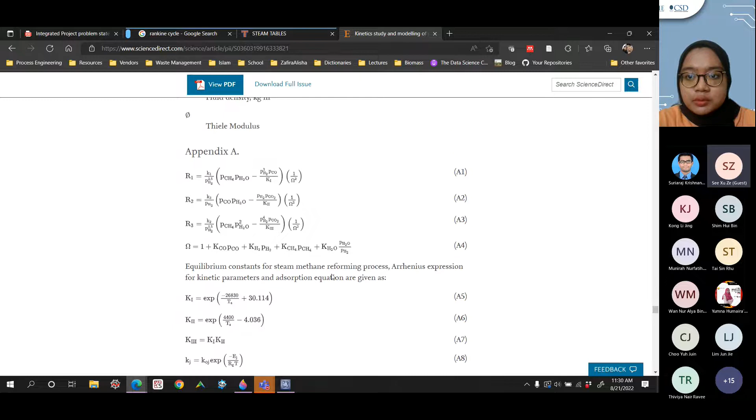What is this? Unit less term, unit less term. What kind of term? Oh, this term, right.

Yeah, you have the kinetics. So in this case, K. What is K? Yeah, oh, KCO. KCO is K1 in Roman. Oh, this one. K1 is this one, K2 is that one. K3 is this multiplied by that, and this guy is over here.

And then we just need to know what is then KCO, KP, KH2, and then this KJ is KOJ. So we need to find KOJ and then EJ and G, and then this whole KCO, KH2. Oh, KCO, KH2, I guess this is then the KJ and so on. Oh, this one, KI, bigger K.

So where are the numbers? The numbers. Where's the number? Yeah, see, this is then go to... what is this? K0.

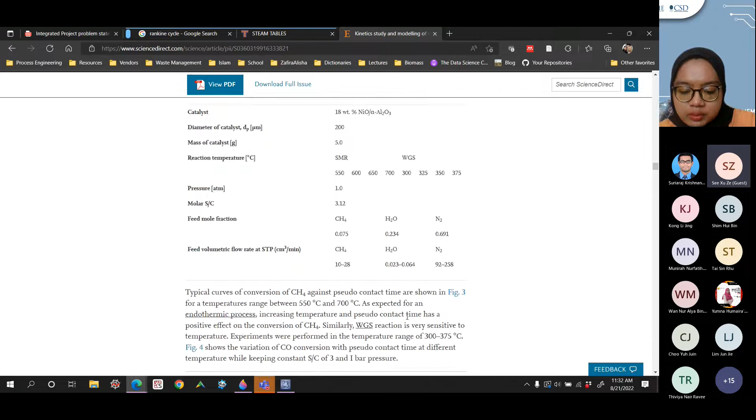Complicated papers. It gives the kinetic expressions, but there are no numbers. Right. What is this? Yeah, anyhow, you have to go through the papers. Kinetics.

You can also do this for simple kinetics, or you could also find it somewhere in the textbooks. You have to find the paper, find this paper, and then... the paper, no. Oh, it's different, it's a different base, but anyhow, because this base is I think alumina, rhodium. This one is alumina, this is rhodium as well. So...

Yeah, anyhow, any other questions? Hello, Mr. Zulfan, yeah. Here I would like to take the opportunity to ask a question from the audience that has been sent through the registration form. The question is: Is Symmetry useful for fields other than engineering as well? If yes, can you please explain for which fields and how so?

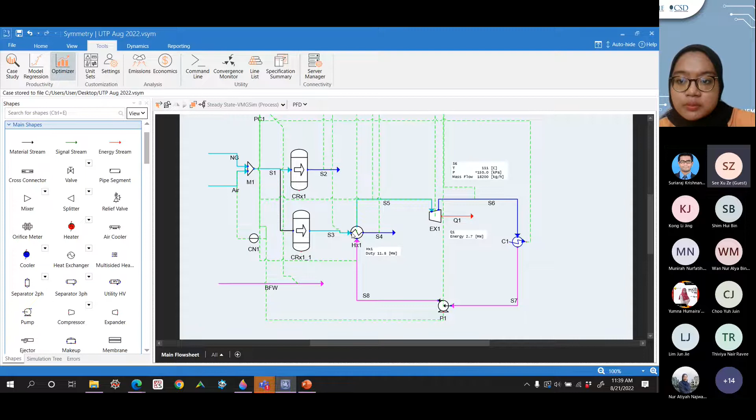There's a lot more optimization software here, which final year or master's students doing process optimization can appreciate. If you go to tools, there's an optimizer. We don't have time to go through it fully, but for example, you can maximize energy as an objective function, with manipulated variables being the inputs we put in, like turbine efficiency, pump efficiencies, steam pressure, steam produced, and so on, along with constraints, so it tells us the optimum numbers for these items to maximize the electricity produced.

If you run this, under settings there are a bunch of optimizer solvers to select from. As opposed to HYSYS, which only has about 3 or 4, this gives a lot more options for optimization solvers compared to HYSYS and Aspen Plus.

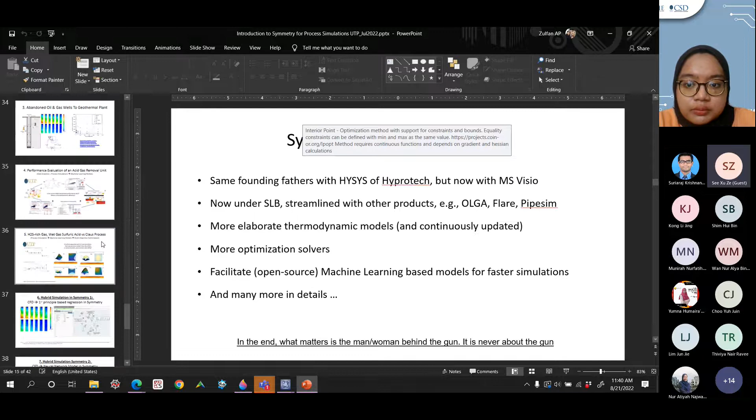This is what I like a lot now: it has machine learning features built in. I showed you this at the beginning, which Aspen doesn't have, even though they claim to.

In this case, as you can see, I make a neural network model from experiments or from other simulations, and then put that neural network model into this unit operation. So this becomes a hybrid modeling approach, predicting something that isn't conventionally predicted in the first principle model.

In this case, I'm predicting erosion rate. So if I have a well or pipeline simulation model as a first principle model, I can put in this unit operation so I can see the erosion rate at every elbow. This is hybrid simulation, which Symmetry now has.

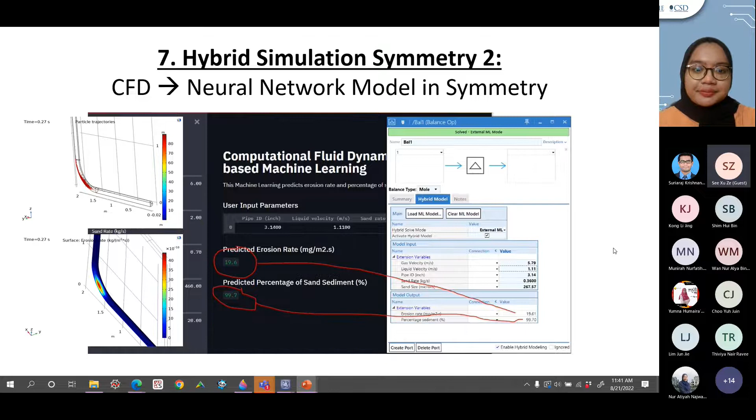Another example of what I meant earlier: you can replace a whole plant with one block, and that's easy to converge. In this case, because we deploy this on the plant and get data hourly, some of the data cannot converge the simulation because there are 5 recycles in it.

We have to manually key in a new starting point so it can converge, but on site nobody can do that. So to remove this convergence issue, we replace this whole bunch of unit operations with one simple block. Using the same inputs they have, we can calculate the performance of the unit.

In this case, I also replaced the distillation column with a machine learning model, a neural network model—this column replaced with that one. So I can visualize and build plants using a first principle model connected to machine learning models, which is a hybrid, and that's much easier to converge compared to the full first principle model. So for process optimization, we can better use this modeling approach.

Let me know if this is not clear. There are many more details, but these are the big advantages I think Symmetry has. Obviously there are also downsides.

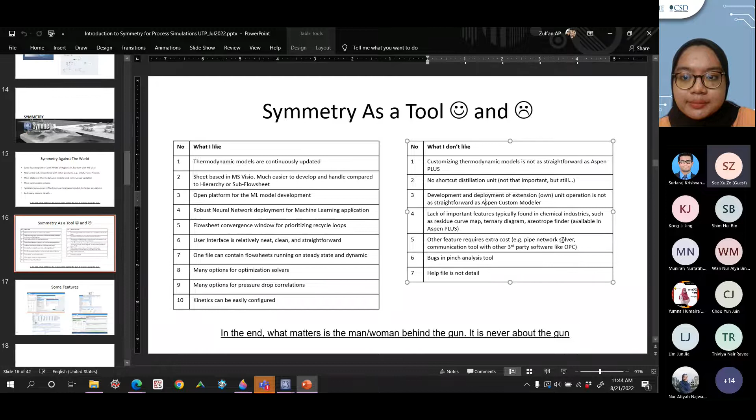And there's a bug in the pinch analysis tools. That doesn't mean that I like the ones that we have in Aspen HYSYS - I also don't like it. But then, well, we do pinch analysis using Excel anyhow. And then the help file is not that very detailed sometimes.

Anything else? Is that clear? You can ask for more, if you think that is not so clear.

So I think this is so. Kong Li Jing, what do you mean by this question?

Hello, sir. Actually, there's a question being asked by the participant. Yeah, oh, so I - okay, just write it down. Oh, okay.

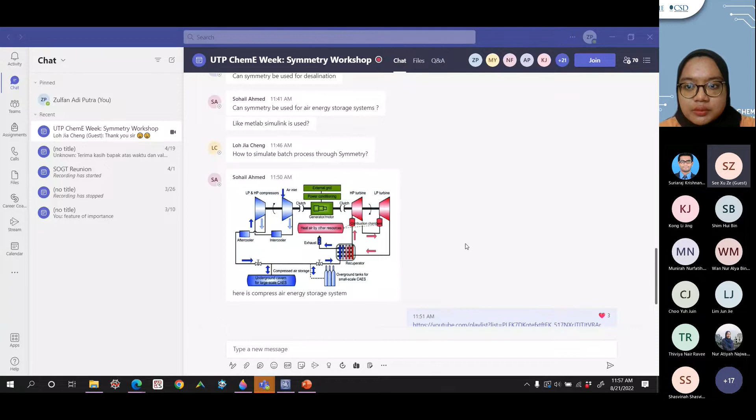Any other questions? Hello? I believe there is no more question from the audience.

No, yeah, good. In all of this, I asked this to Li Jing, what kind of problems do you want to have? Because it will then be better to simulate this with your own problem, like what we just did. So thank you, Li Jing, for that.

So now I don't know if you can understand this quickly, but nonetheless, it is there, and then you can always visit this. I will maybe share this later with you, so that you can have an idea, and then you can then work on it, make this thing better than the one that we have now.

For the other stuff, like this desalination and then the energy storage system, is something that, again, like I mentioned repeatedly already, understand the process first, and then understand the functionalities that are in that process. Then and only then you can model the process in any software. Yeah, not simply related to symmetry in any software.